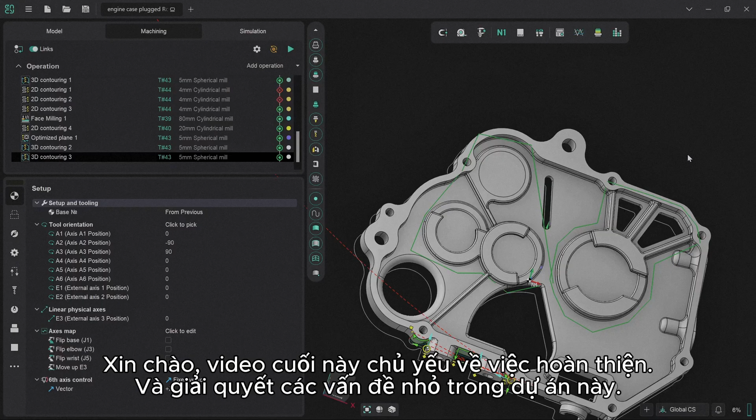So the first thing I'd like to focus on is cancelling out these red operation nodes. We're going to focus on the Flat land 2 operation first.

If we click on the operation and then hover the mouse over the node, it tells us what the error is, which is a contact with workpiece on rapid feed.

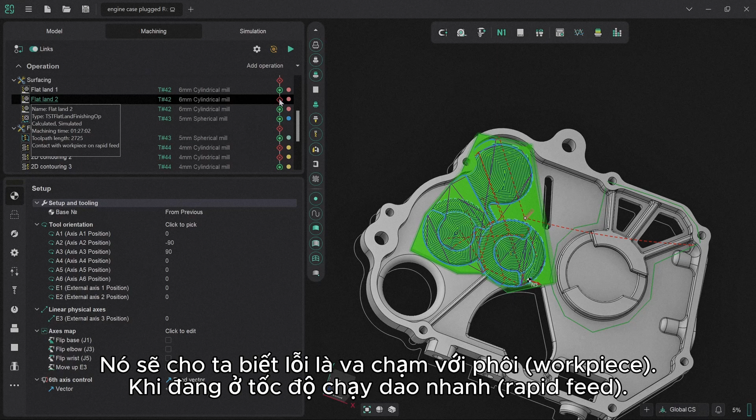This is an issue that can be solved in the links menu. So if we go there now, the two primary things causing me some concern: one is the link clearance height, which is the height set for the tooltip to elevate by when moving across areas that it's already machined.

0.1 of a millimeter is rather small, so I'm going to bump that up to 2 millimeters, which is a little exaggerated, but with the amount of interpolation that goes on with robot motion, the more we give it, the easier a time it has.

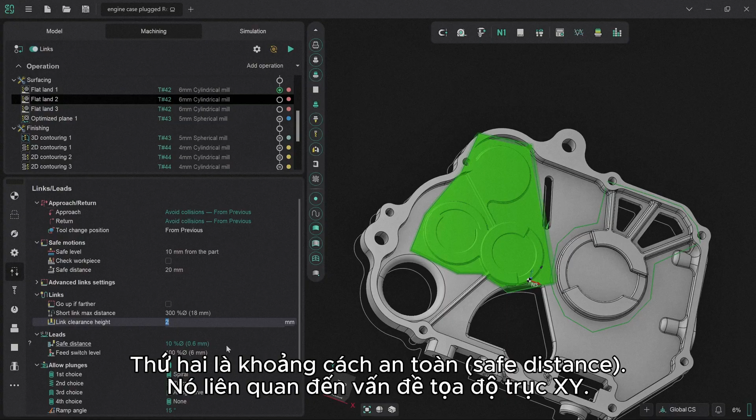The other one is the safe distance, a sort of XY coordinate issue, whereby it's only got 0.6 millimeters to play with there, which is a bit on the small side. So I'm going to bump that up from 10% to 50%, which should give us 3 millimeters, and hopefully that should resolve the worst of those problems.

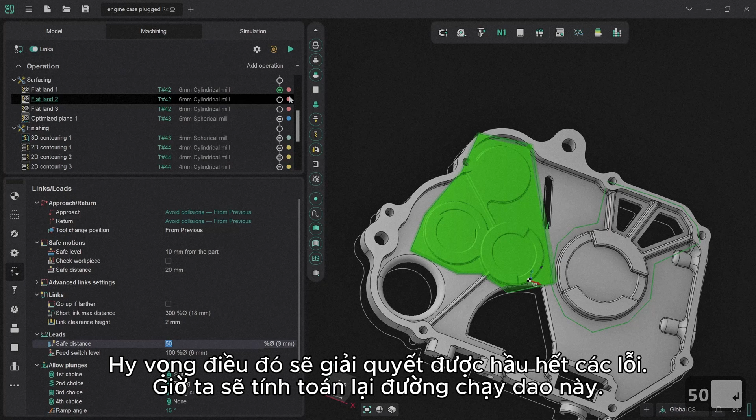So we're going to recalculate this now, and the unfortunate side effect of having to go back and do changes midway through is that it affects every subsequent operation as well. So I'm going to very quickly recalculate everything just to make sure everything is recalculated fully, because sometimes it does leave gaps.

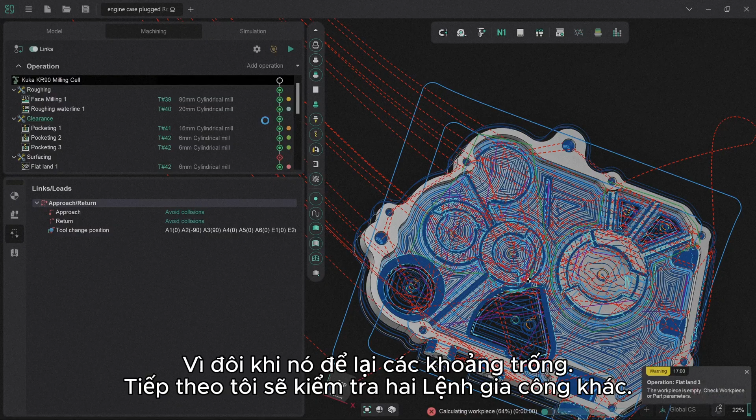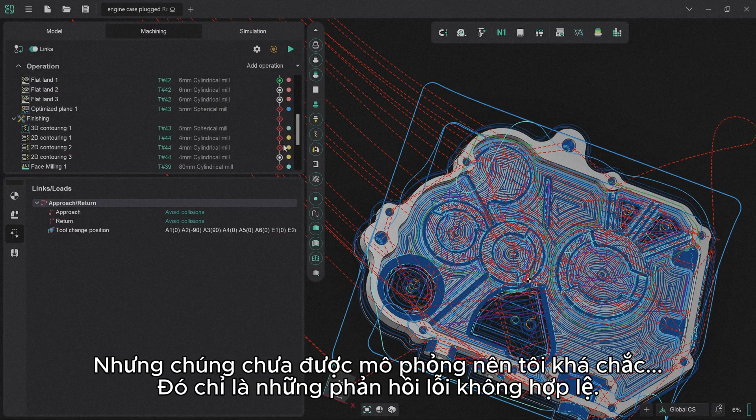Subsequent to that, I'm going to take a look at the other two operations that were still coming up red after the simulation. There's a few more red things coming up here, but none of this has been simulated since, so I'm fairly confident that most of those are invalid responses. However, the 2D Contour 1 and 2D Contour 2 operations were presenting us with problems.

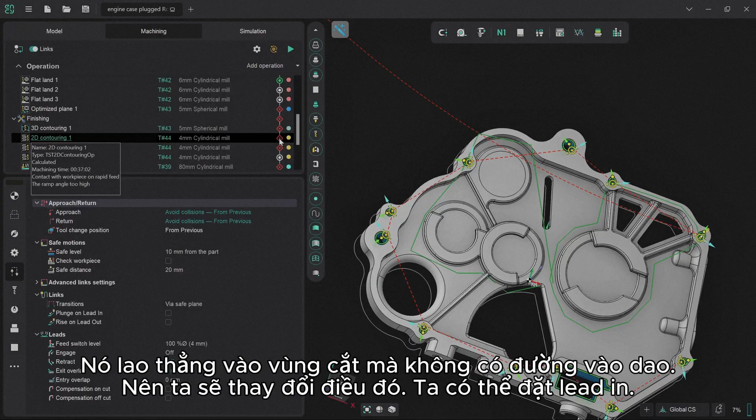So if we take a look at 2D Contour 1, the first thing I can see that's likely to cause us an issue is that we don't have any kind of proper lead in or lead out, nor any kind of plunge resolution. If we hover the mouse over the red node, we see contact with workpiece on rapid feed and the ramp angle is too high. That means we don't have any proper ramping enabled, and the contact with the workpiece on rapid feed means it just plows straight into where it needs to be cutting without any kind of lead in.

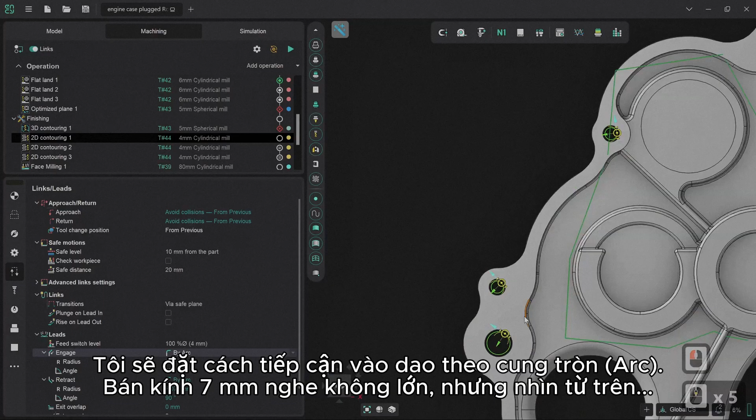So let's change that now. We can set the lead in. If we set the engage lead in by arc, 7 millimeters radius doesn't sound very big, but if we pan over to a top-down view, we can see this radius is going to exceed the bounds of these smaller holes. So I'm going to set that radius to 3 millimeters instead, much tighter, but that should keep everything within its respective tolerance.

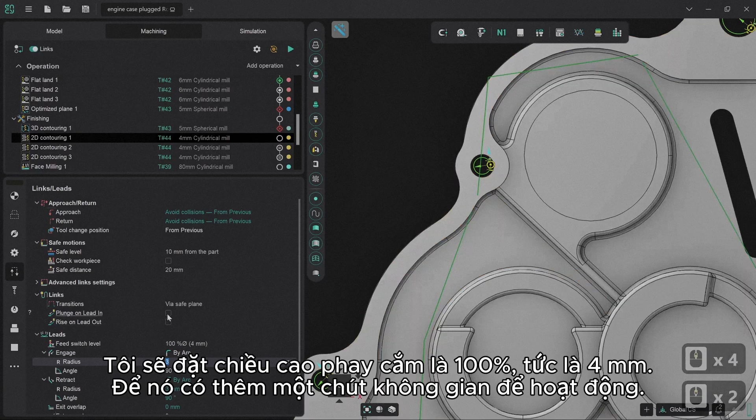We're also going to set a plunge on lead in. So I'm going to set the height of that plunge to 100%, which is 4 millimeters, just to give it a little bit extra to work with.

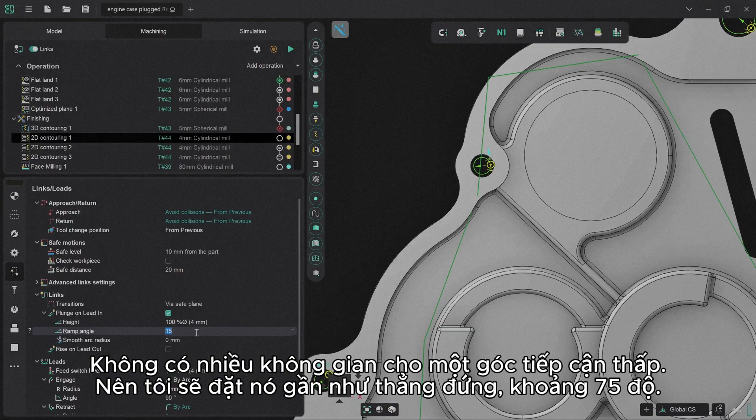I'm also going to increase the ramp angle quite drastically on this, because these are quite small holes that they've got to work into, there's not a lot of space for a very low angle to come in. So I'm going to set it to near vertical, but not quite, so 75 degrees. And I'm also going to smooth the arc of that approach as well, so it's a 5 millimeter radius on there. Okay.

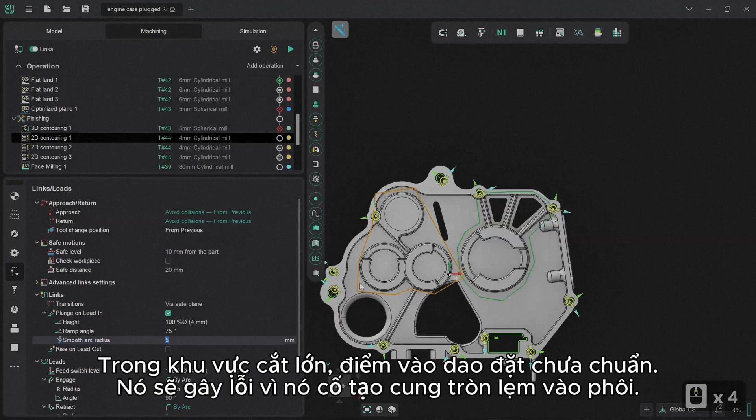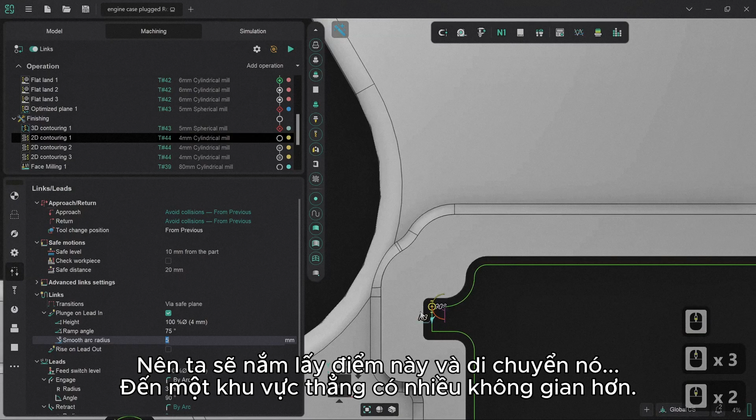Now, finally, there was one other thing I spotted, which I'm hoping you should have caught as well. In this large cutout area here, the placement for this entry point is not great. It's going to cause us problems because it's going to try and arc out into the actual workpiece itself. So we're going to grab this and move it over to a straight area where it's got plenty of space to work with.

And now we're going to recalculate all of the toolpathing for this. So if we regenerate that toolpath now, excellent, we should see that everything feeds in properly.

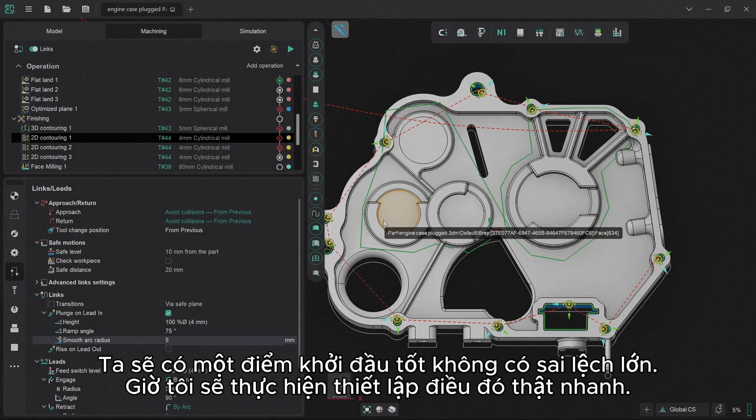So I'm going to copy these same settings over to the 2D contouring toolpath as well, purely because I'm pretty confident this should resolve the bulk of our problems. And it means we've got a good starting point with no major differences between them if there's anything further we need to address.

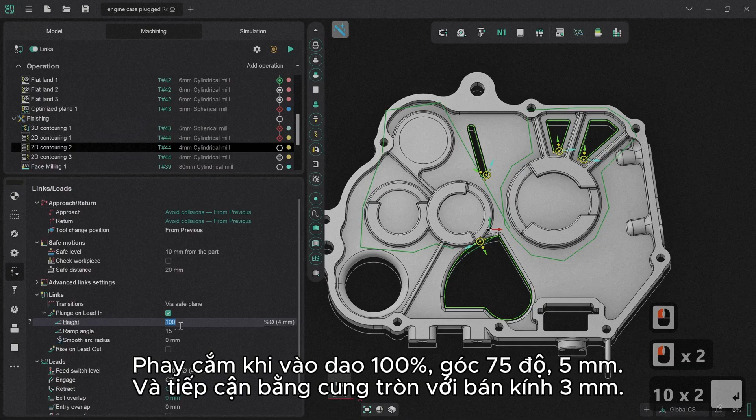So I shall very quickly do that now. Plunge on lead in, 100%, 75 degrees, 5 millimeters, with an engage by arc of 3 millimeter radius. And we now click on generate.

Okay, that's all looking good.

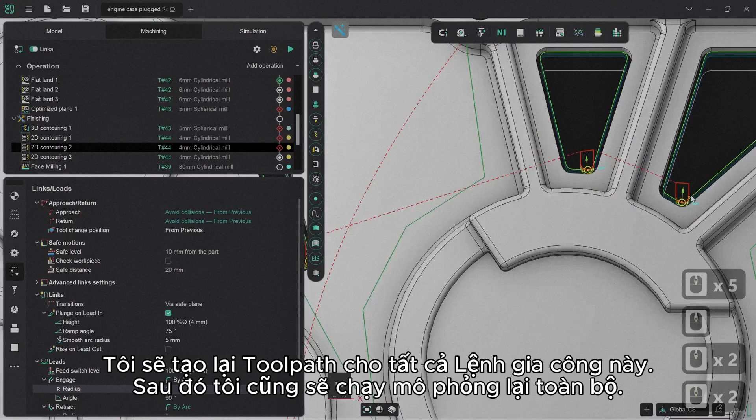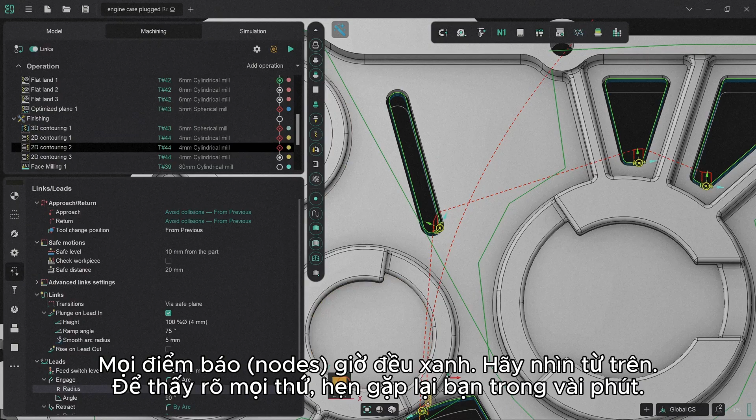After all of that, what I'm going to do now is regenerate all of the toolpaths for all of these operations, and then run the simulation as well. To save time, I'll come back once the simulation has been run so you can see the end result and see that all of the nodes are green. Let's go back into a top view here so we can see everything clearly, and I'll catch you in a couple of minutes.

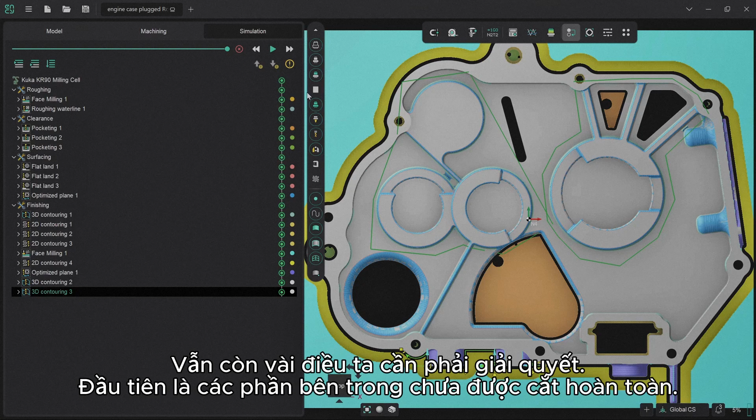Right, so now that we've come back, we can see that at the end of this simulation, every single node that's in here is green. This is really good news for us so far. There are a couple of things that we still need to resolve. One is the sections that are internal that haven't been cut completely cleanly, although these are very easy to fix. And also there is this section here that hasn't been cut particularly well.

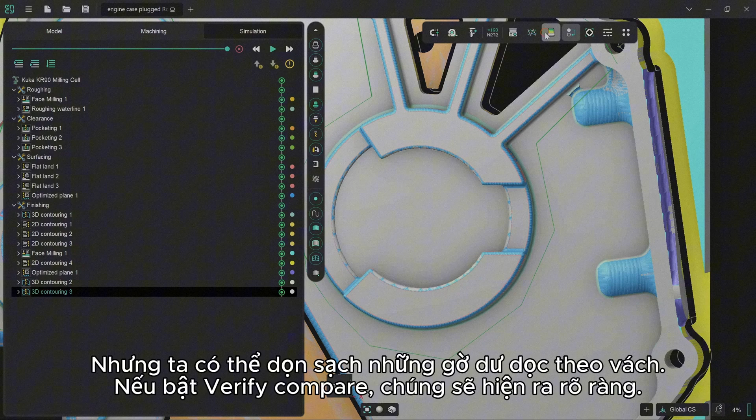Realistically, something that's a side face like that would ordinarily be handled as a secondary operation with a fresh new orientation. We can, however, clear off some of these weird spurs that are forming along the edge of the wall here. So if we turn on verify compare, they should come up a lot more cleanly. You see these big blue jagged marks here. Okay, so we can resolve that.

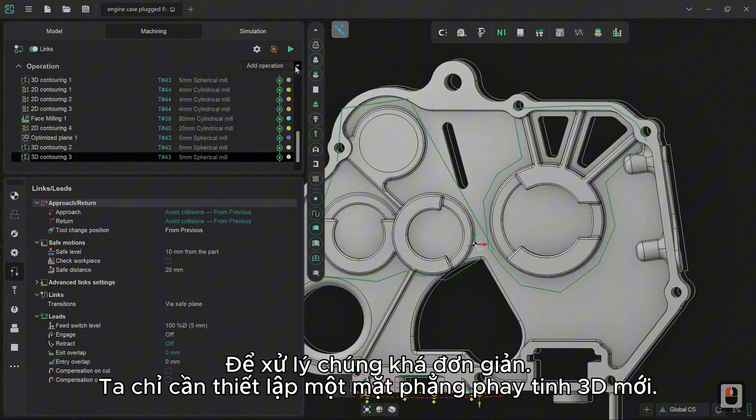And as I say, these two little blue sections here are something that we also want to deal with. So to deal with those little blue sections, this is quite simple. We can just set up a new 3D finishing plane. It doesn't have to be very, very big.

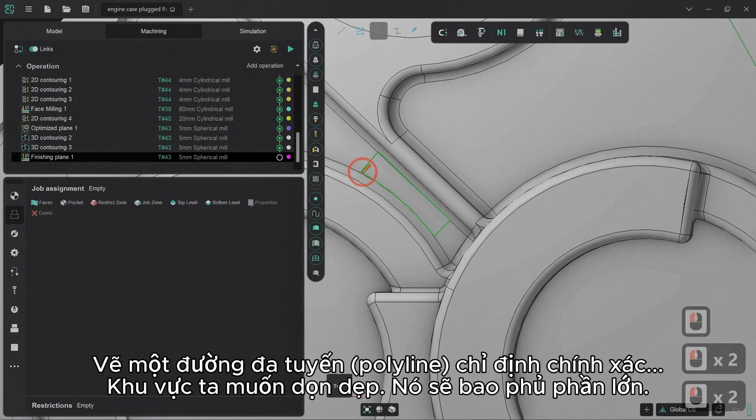So if we just look at the exact area that we need, which is just this little segment here, and if we go to job assignment, we can now draw a polyline specifically describing the exact area that we'd like to clean up, which I believe this should cover the majority of. So if we just highlight that for a second, yeah, you can see that should do a nice job of it. And we also want to do this one as well.

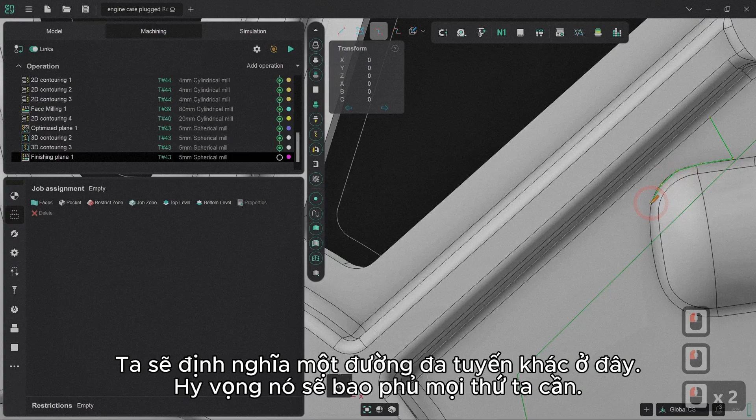So there we go, that's where we need it to be. So we'll define another polyline here. And that should hopefully cover everything that we require. So let's just check. And yes, perfect.

Okay, so the important things to remember, especially when drawing a lot of polylines on here, is to make sure to deselect the tool afterwards, because otherwise you'll start drawing errant lines everywhere, which is a bit of a pain.

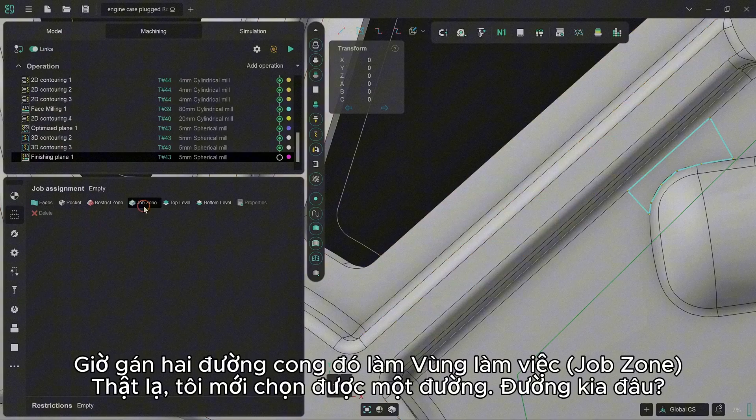And we now need to define both of these curves as the job zone. Interesting, I only had one curve selected there, so let's find out what the second spline is. So the first one - oh no, it maintained the selection of both. That is strange.

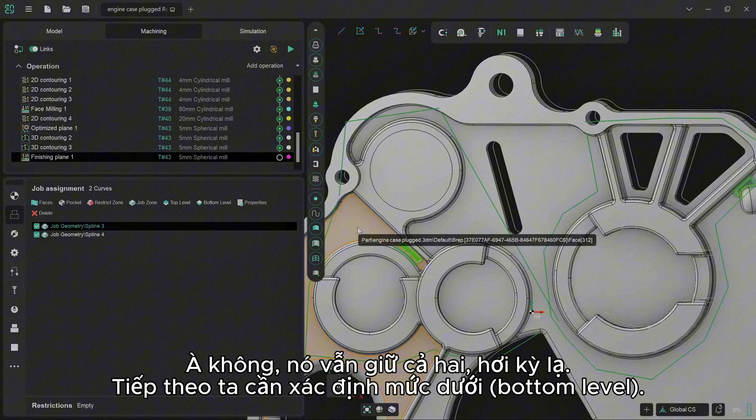Okay, so the next thing that we need to define is our bottom level. So I'm going to select this plane and click on bottom level because that's the lowest we want it to cut to. So under strategy, we can now look at what that height is.

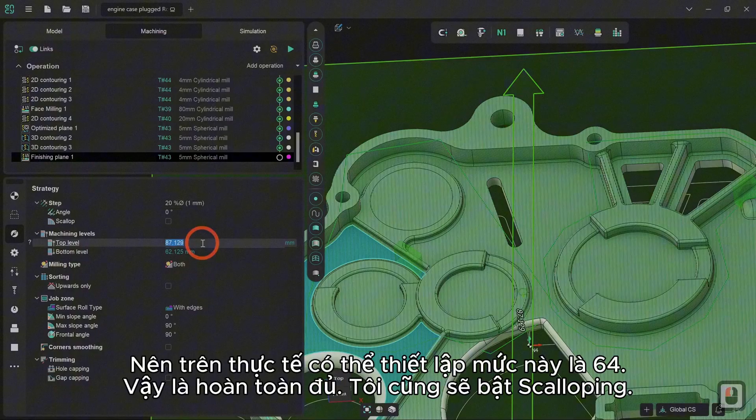We only need to take 2 or 3 millimeters down. So realistically, we can set this to, I don't know, 84, and that should be absolutely enough. I'll also turn on scalloping for 0.1 of a millimeter, just to be absolutely safe.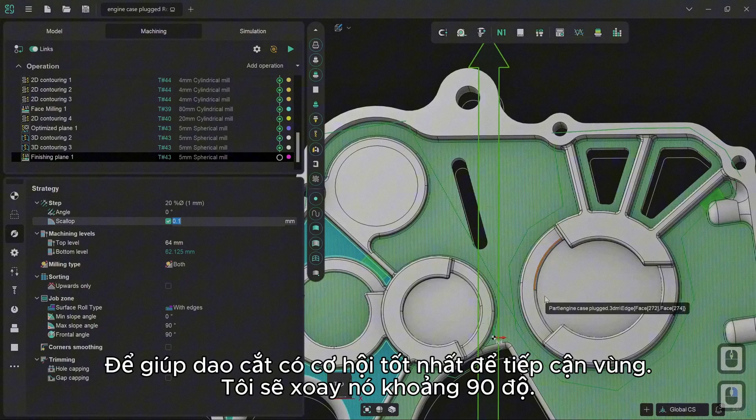Now we can also adjust the angle at which we're cutting as well, just to give our cutter the best fighting chance of getting in there. So I am going to rotate this by about 90 degrees or so, just to try and approximate the best usage of space there. So that should be absolutely fine.

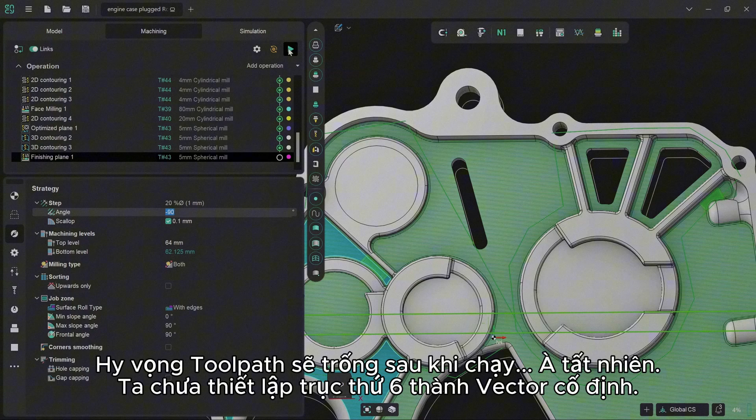We should now be able to generate the toolpath, and hopefully - toolpath is empty after run. Of course, we didn't set the 6th axis control. Set that to fixed vector and then regenerate.

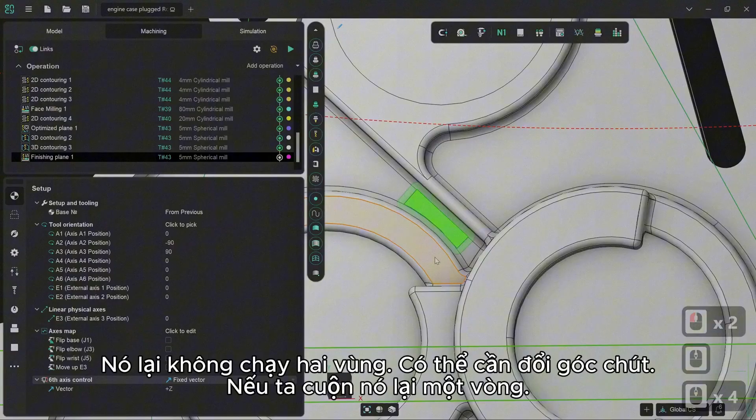And there you go, we now only have 2 small areas that are being machined. Although for some reason it's not bothering with the second one, which is not ideal. So it may be that we need to change the angle of that slightly.

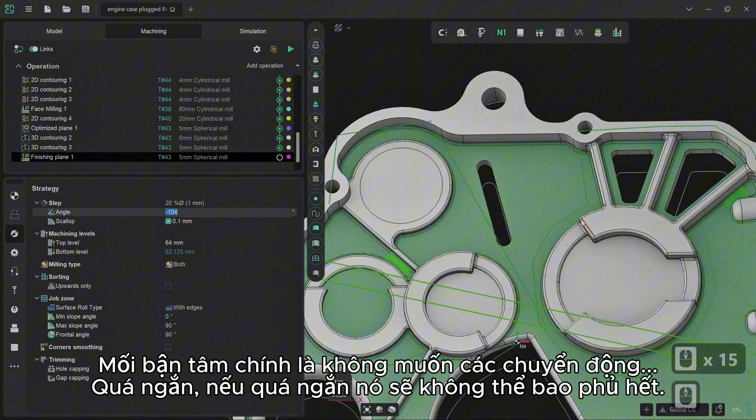So if we scroll that around a little bit - my main concern is that we don't want any of the movements or motions to be too short, because the shorter it makes them, the less chance it has of completely covering the area. So we regenerate that toolpath now.

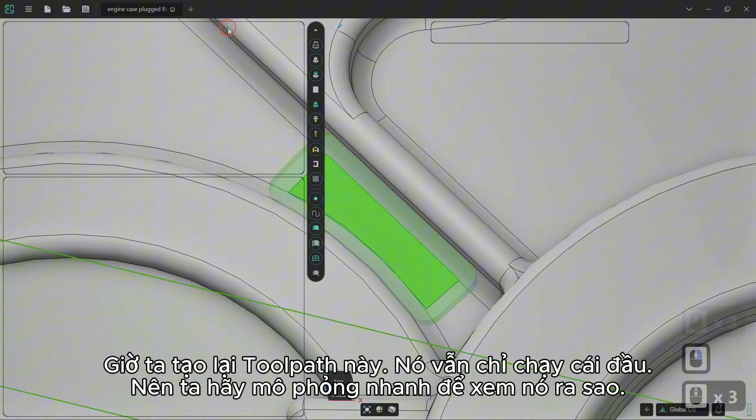Okay, it's still only doing that first one. So if we very quickly simulate this just to see what it comes up with, slow it down a tiny bit. And yeah, so it cleans up this area perfectly well.

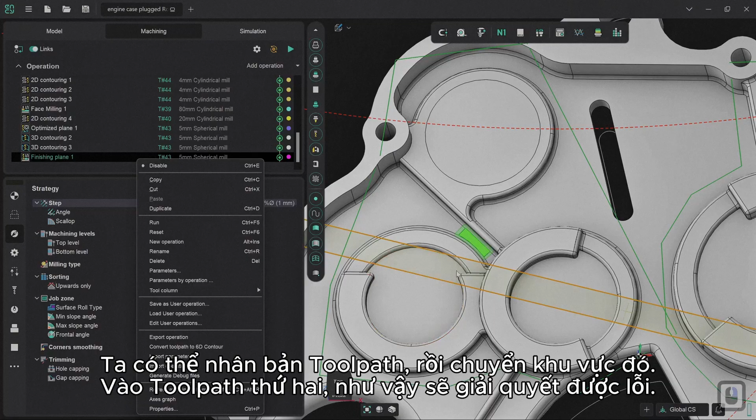Doesn't bother cleaning this one up though. So what we can do to force its hand is we can actually duplicate this toolpath and then just move this region into the second toolpath. So that may end up resolving our problem. It also means that we can adjust our angle accordingly if we need to as well.

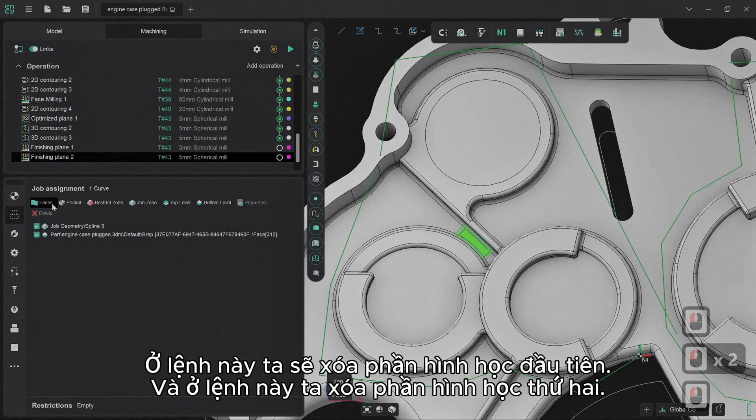So we click on duplicate, and in this one we delete the first geometry, and in this one we delete the second geometry, and we recalculate both of these. Excellent. Okay, that should be absolutely fine. And we can now simulate both of these from where we are.

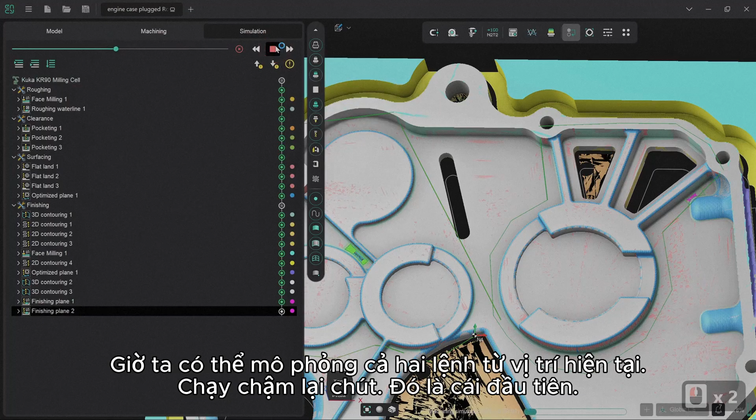So slow this down. There you go. So that's the first one. And now we have the second one being machined away, which is perfect. So that should give us a much cleaner surface finish there. And you can see how there's a tiny amount of pale blue, but nothing serious there.

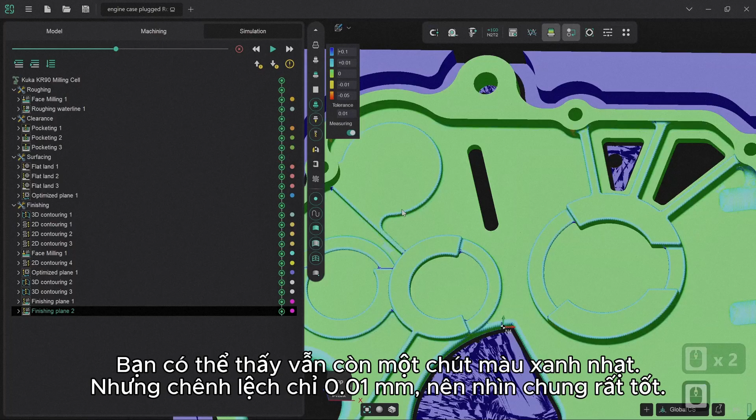And bearing in mind the pale blue is only, well, 0.01 of a millimeter difference. So overall, that's pretty good.

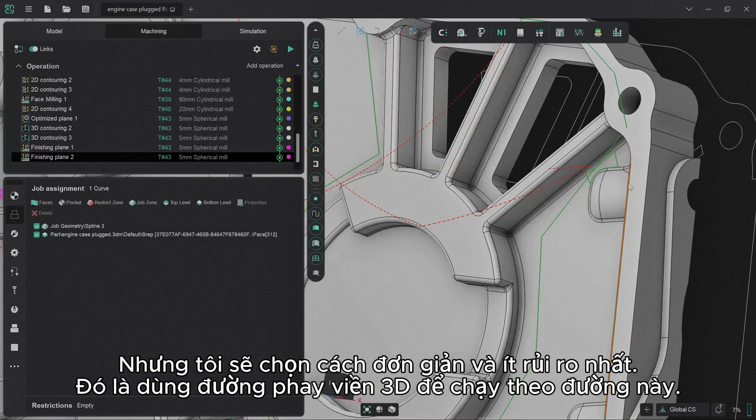Now, finally, I would like for us to try and clean up this edge a bit. There's a couple of different ways we can try and approach it, but I'm going to go with the simplest and the least likely to go wrong. And that is going to be using a 3D contouring path just to follow this curve up. That's it, nothing more. Because as soon as we start following it down, we start running into compensation issues, which can lead to gouges of the part.

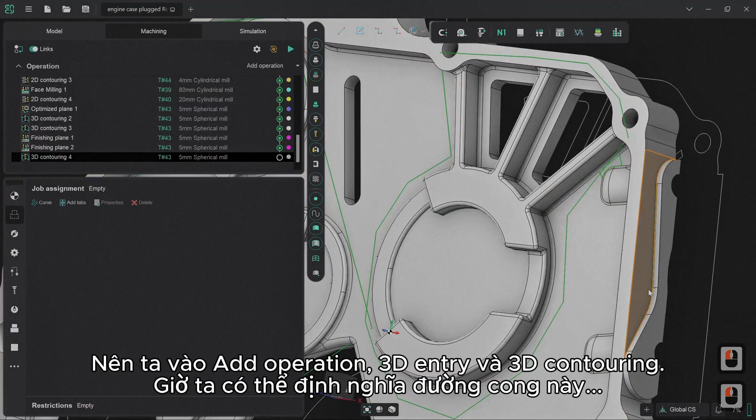So if we go to Add Operation, 3D Entry, and 3D Contouring, we can now define this curve as the curve that we're after, and we want to make sure that there's the offset defined here as well. So when we pan over to the top, we can see that that line is now offset from here by half the tool width. That's great.

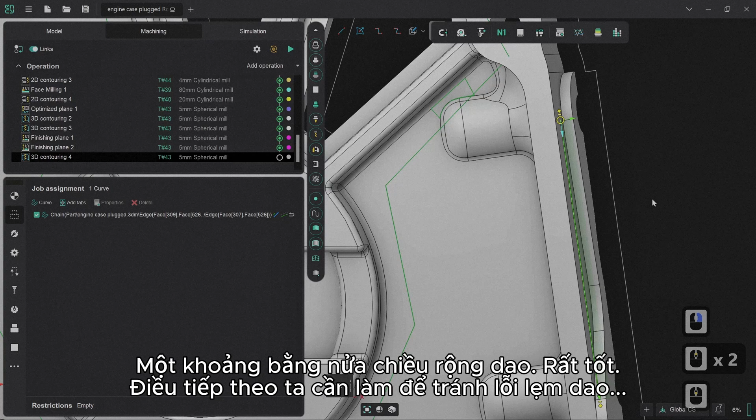The next thing that we need to define, so as to avoid any kind of gouging issues, is if we go into strategy and we set the bottom offset of this as well. So I'm going to set this to 1.5 millimeters, which should give us just enough clearance to be able to make a very nice, quick, clean scoop of that.

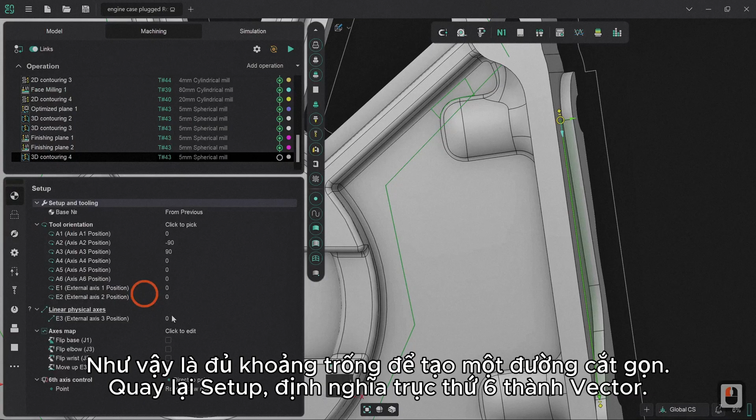Okay, so we'll go back to Setup, define the 6th axis control to fixed vector, and press Generate. And with a little bit of luck, hang on, we've got our first problem here. What's this reporting? Contact with workpiece on rapid feed. Okay, we know how to deal with this.

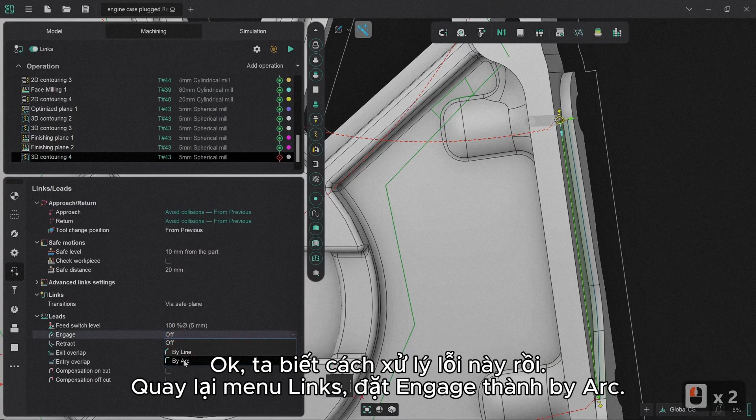So if we go back to the links menu, and we set engage to by arc, it should swoop in and out nicely on that. We don't need to bother with dealing with the radius of that or anything at this stage. That should do us well. I'm also going to, actually no, I'm going to set that by line because I would like it to come off and on nice and cleanly.

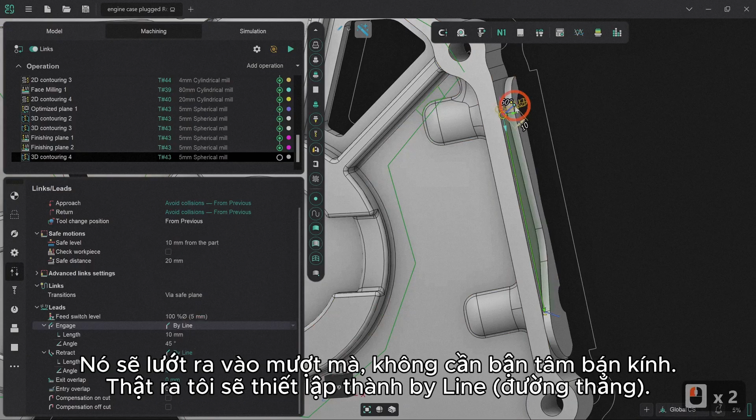So we should be able to recalculate that now, and hopefully we won't run into any problems. There's none indicated there. So if we simulate this now, we'll run this nice and slow just to check. When we click on Run, you see the tool coming in here now.

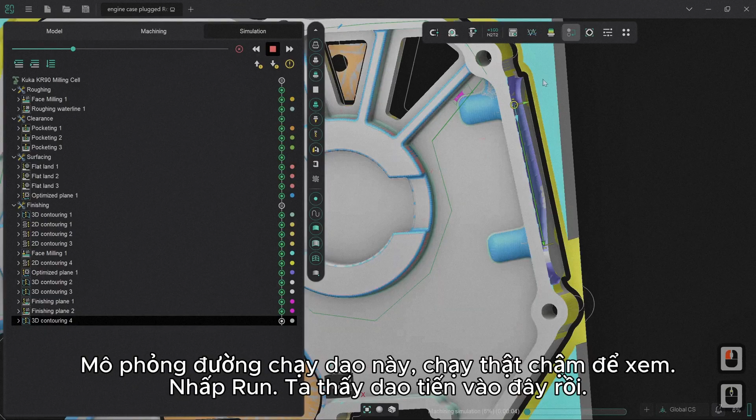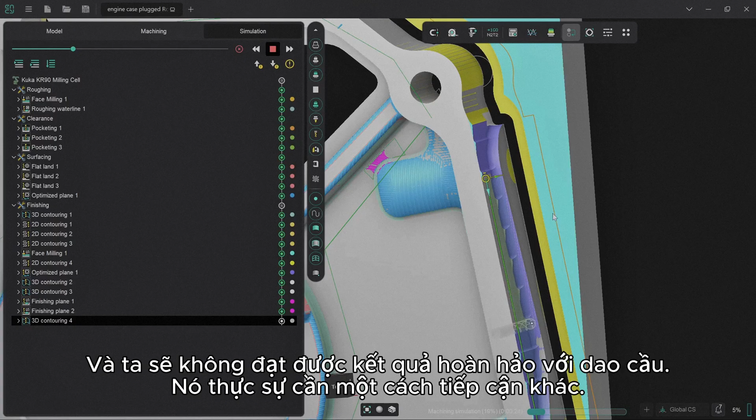Okay, so that now comes in, and all it's doing is just scrubbing off those spurs there, nothing more. Because this is already fairly close to final height, and we're not going to achieve a perfect result with a ball nose finish, because again, that really is something that wants to be handled at a different approach. But for scrubbing off as much material as is possible to try and minimize that load going forward, I think that's probably about the best result we're going to achieve with this.

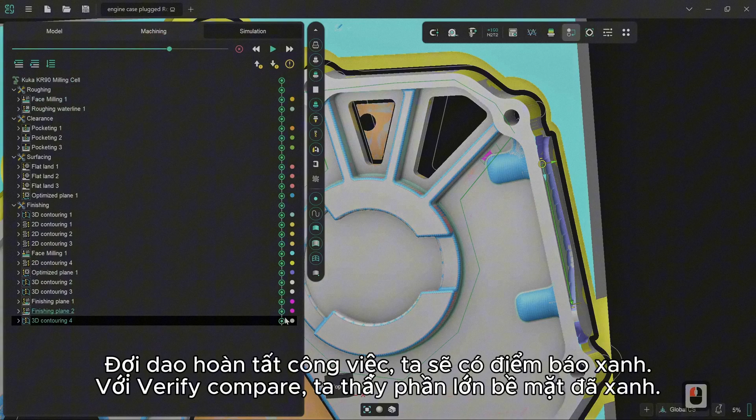So wait for that tool to figure out where it's going now, and once that's finished, we should get a green node there, which is great. And with the verify compare, we can see that the vast majority of this is now green and clean. This is about as close as we're going to be able to get to completely finishing a project on this kind of a shape.

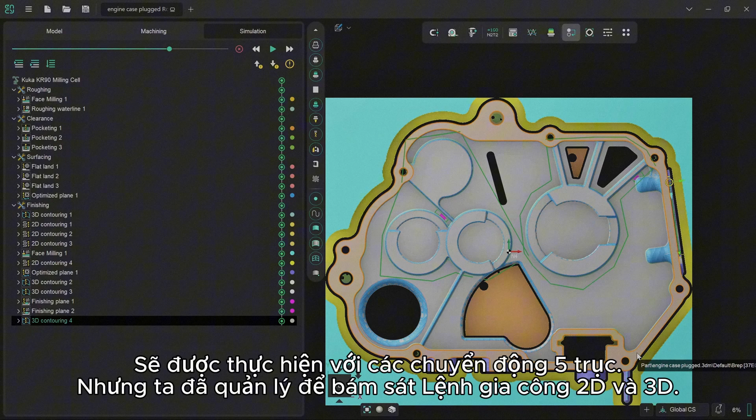So ordinarily this sort of form would be done probably with more 5-axis motions, but we have managed to stick entirely within 2D and 3D operations throughout all of this, which I'm hoping has highlighted the versatility of these operations to you, as well as illustrating just how powerful some of the tools for being able to fault find and troubleshoot ENCY provides us with.